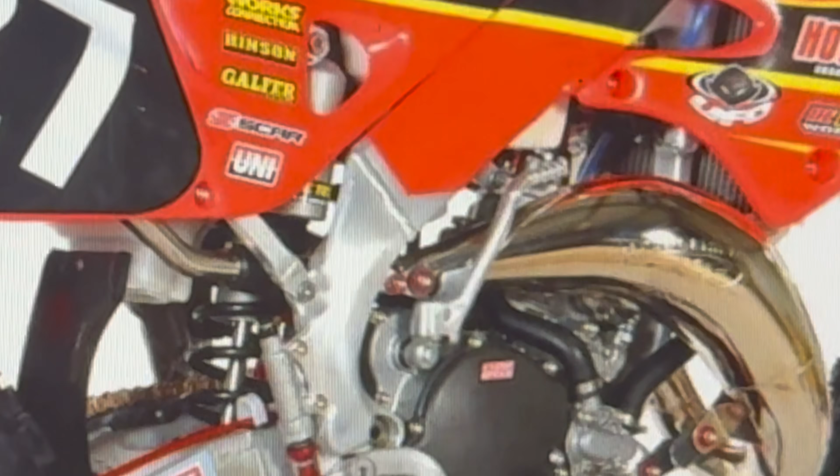Odds are, if you've ridden a dirt bike before, you know exactly what this is. And if not, I'll break it down for you. So for a majority of dirt bike history, this has been the main way that you start a bike.

Essentially, you just unfold the lever and kick it, hence the name, the Kickstarter. What this does is spool up the motor enough to give it a chance to start firing under its own load. But the thing is, in recent times, all major bikes have switched to electric start.

And if you don't know why this is so important, let me explain it to you. Let's say you're riding your bike and you go up this hill. Right before you get to the top, you turn away a little bit and now you're stuck on the side of the hill. Your bike died, so you're pretty much stranded.

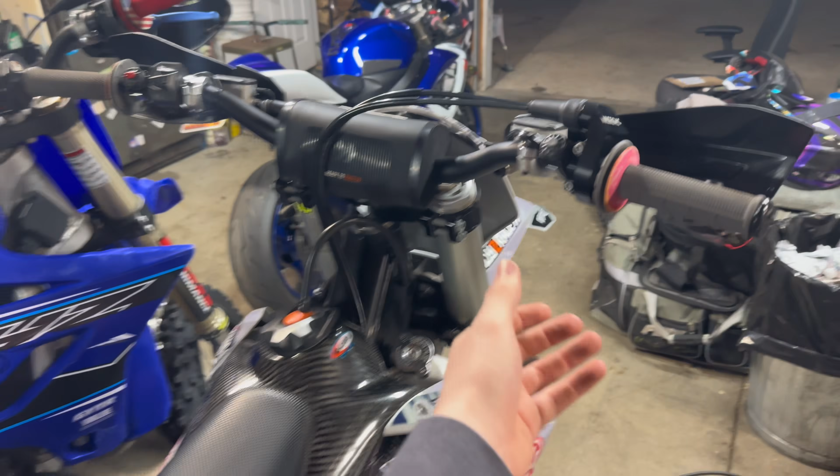Now in order to start your bike, you have to kick it. So you pull out your lever and you get ready to start kicking it, and then you completely fall down the hill. Whereas if you had electric start here, you could just press the button and went on your way.

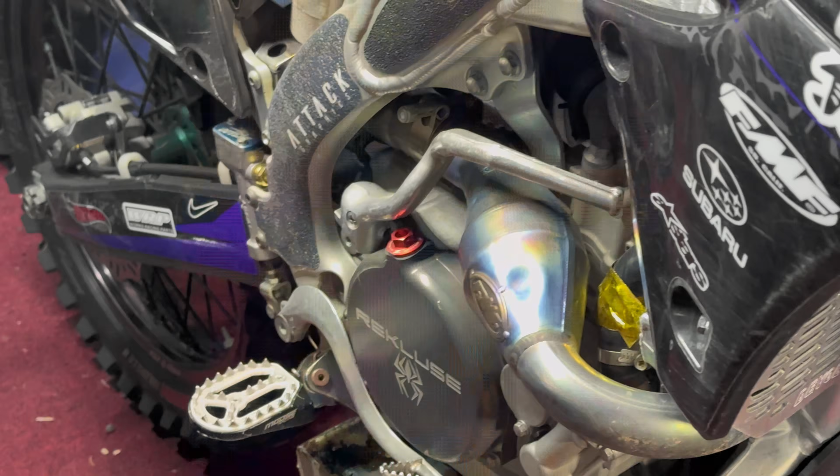This is the exact thing that made me want to solve this e-start problem for older bikes. Because if you put a bunch of money and time into a bike that you love, you shouldn't have to give it up just to have electric start. And over the past 6 months, this is what I've spent all my time developing.

And today, I'm going to be working on the best version I've ever made. But I'm kind of jumping ahead of myself here. So let me just explain how this all is going to work.

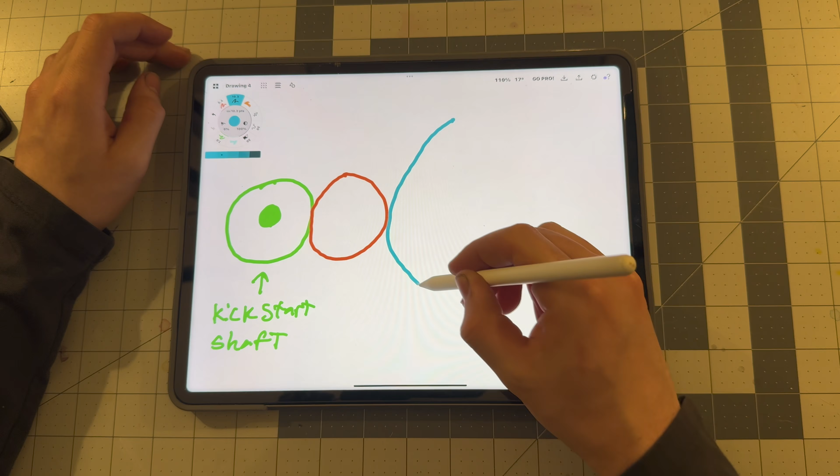Starting from inside the bike: when you kick your bike, you're actually just turning a gear, which turns another gear, which turns another gear, which turns the crankshaft. And turning your crankshaft is what allows the bike to start itself.

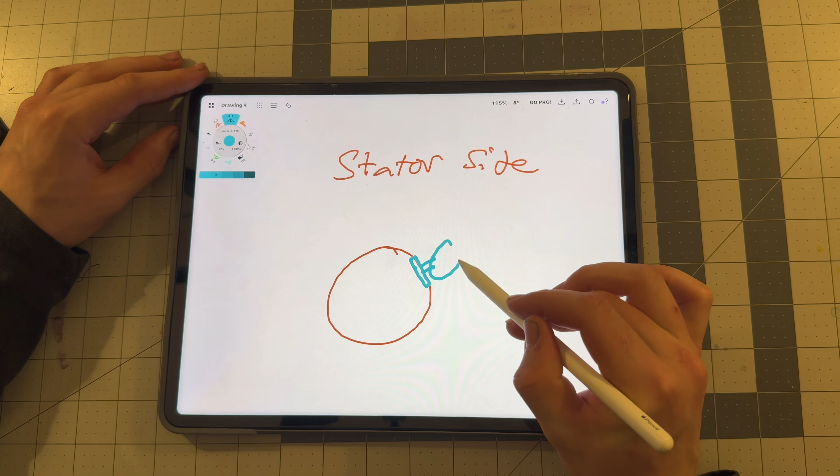Now there are some other people who've designed kits for certain bikes that use this crankshaft thing, but they're smart enough to bypass the whole kickstart deal and they just go on the stator side, which gives you a much easier access to the crank. Thing is, if you do that, you have to build a whole custom stator, and it's extremely bike specific.

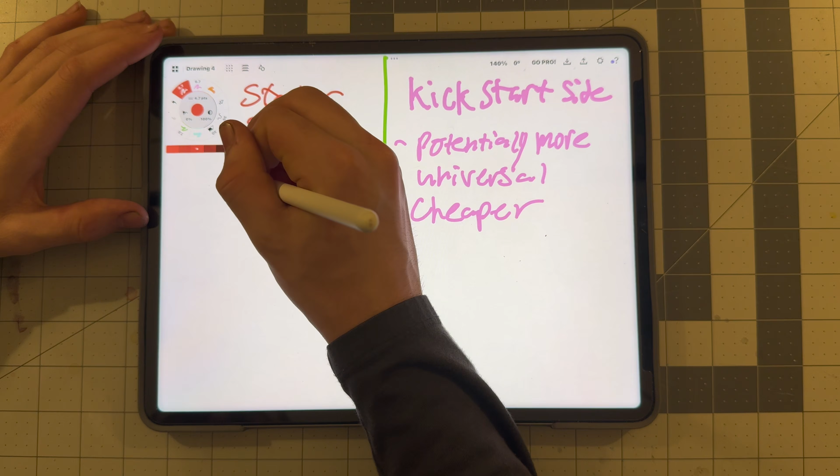But I think if you can make something that goes off of the kickstart shaft and not have to go in the bike as much, you can be way more universal and get a ton more bikes. But here's the deal, right?

When you kick your bike, you're actually sending that kick through a speed increaser. So one kick is like 3 or 4 rotations at the crank. So if I want to make something that can do this automatically with a motor, there's a few things I have to figure out.

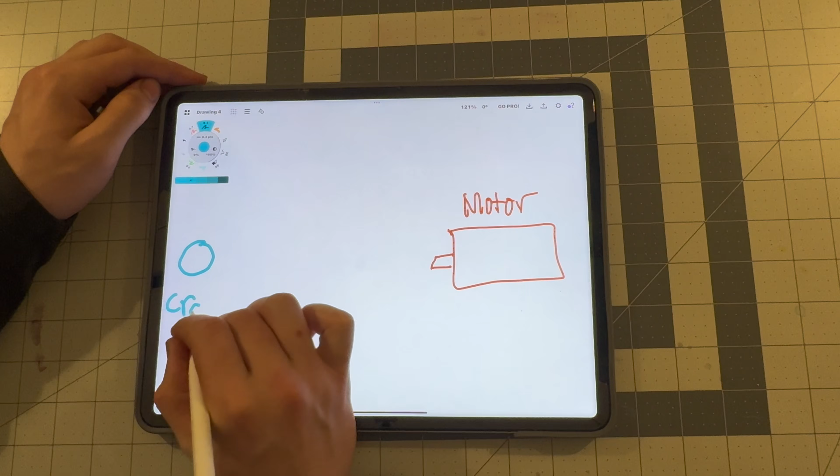I'm gonna have to figure out how to reverse the whole gear reduction that's inside the bike, and then also have to figure out how I'm gonna match the force needed from a kick on the outside of the bike to the kickstart shaft.

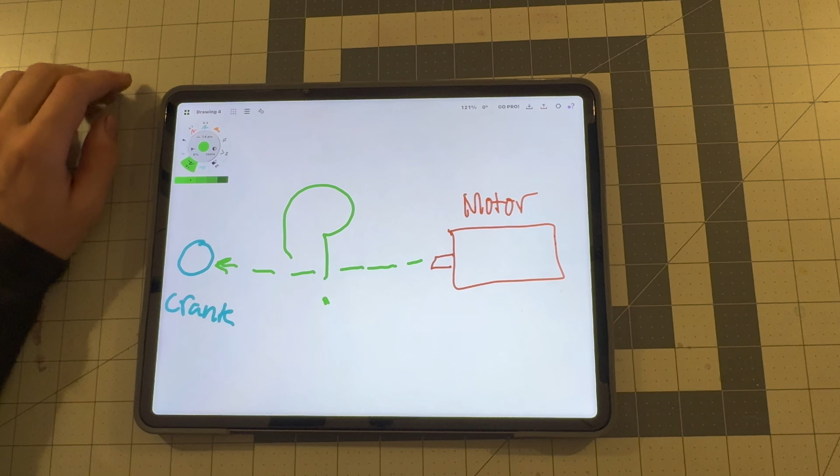And then we have to think about, if I'm gonna have this be like a regular e-start, that kickstart shaft is gonna have to be constantly spinning one direction. So I'm gonna need some sort of clutch mechanism to make this happen.

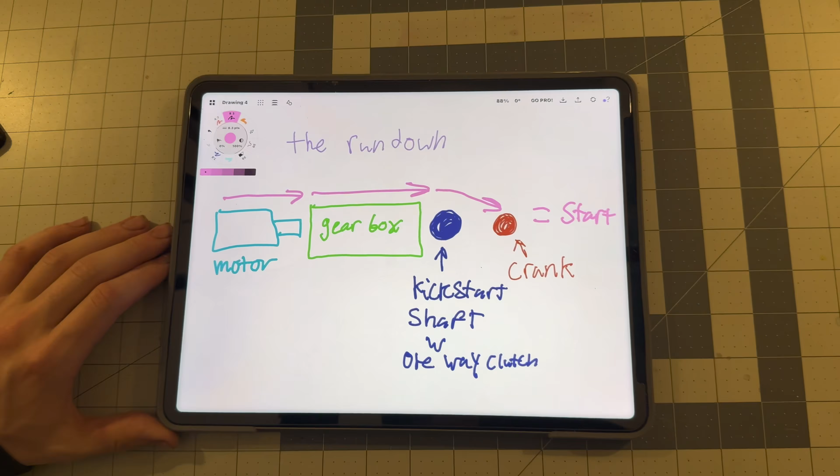So here's how this is all gonna work. I'm gonna make a gear reduction that goes off of my starter motor, which attaches to my kickstart shaft, which has a built-in one-way clutch mechanism, which then transmits torque straight to the crank through the original kickstart shaft stuff inside the bike. To do this gear reduction, I'm gonna use a massive compound gear train.

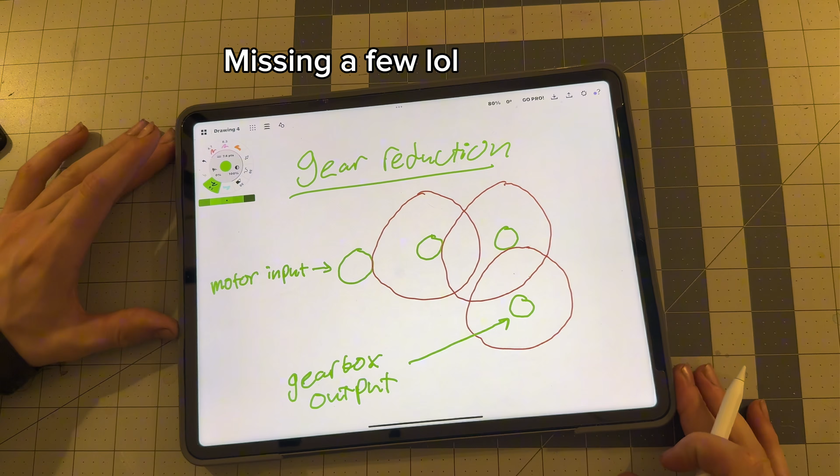Now I'm gonna be honest with you, this is the first time that I've ever made a compound gear train gearbox. I did my math on my reduction and I should need like 5 or 6 gears to make this happen. And after getting everything sized up and looking right, it was time to organize these gears in a way that would fit where I need them to fit.

Because this would all be easy if I could just make it huge, but this has to be able to fit on a bike and be reasonable.

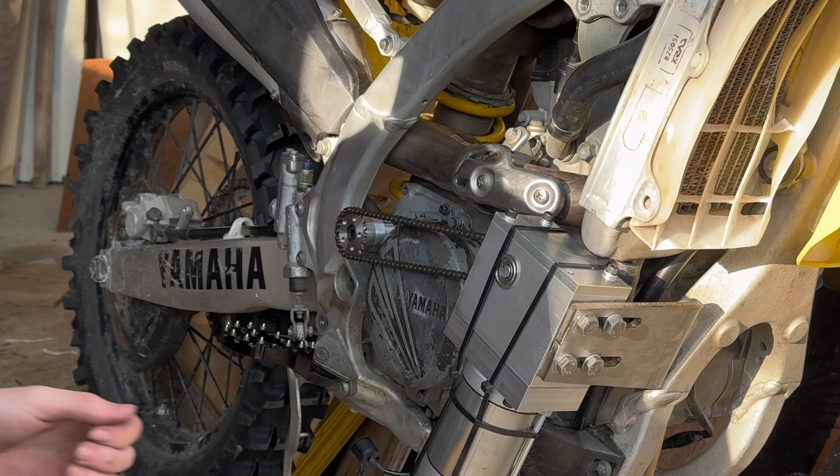Also, in my last design, I used a chain to drive from the gearbox to the kickstart shaft, but this time I'm going to use a shaft instead. This shaft will go straight to a gear inside the gearbox, which connects to a crown gear that starts the whole drivetrain of the system.

There's a lot of interesting things I could go into with this, but with that done, I moved on to figuring out my internal clutch mechanism for this design.

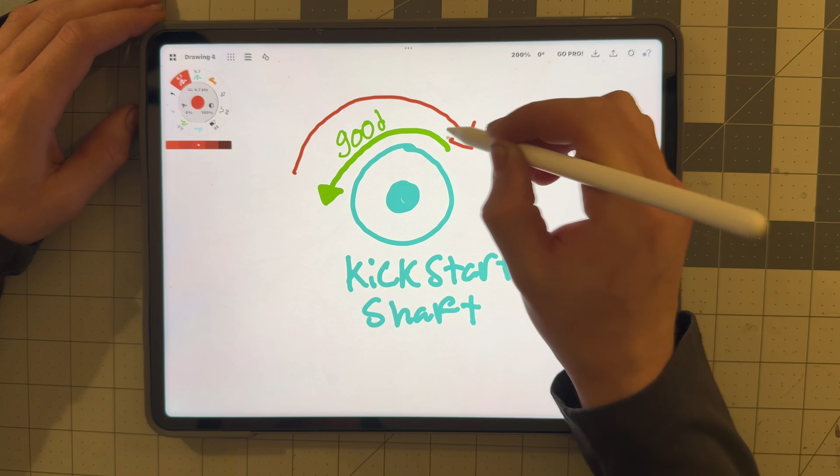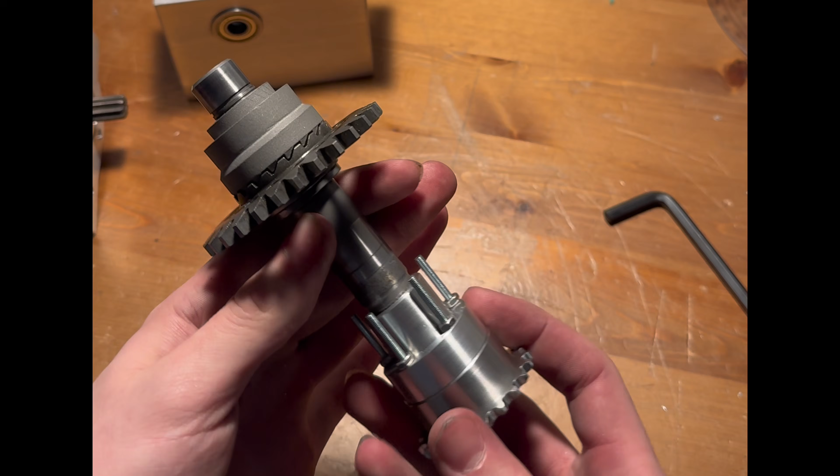On the last iteration of this, I used a helical threads kind of design. Imagine you have a bolt and a nut, and you want to move the nut up the bolt a little bit - you just turn the bolt underneath the nut. So if you think of my kickstart shaft as the bolt and my clutch mechanism as the nut, you can see how I could use this.

When the kickstart shaft is turned, it will move the clutch grabber piece towards the back of the starter gear. From the factory, the starter gear has teeth on it that allow it to be driven this way. Then when the motor takes over power, it will automatically disengage because of the way the ramps are designed.

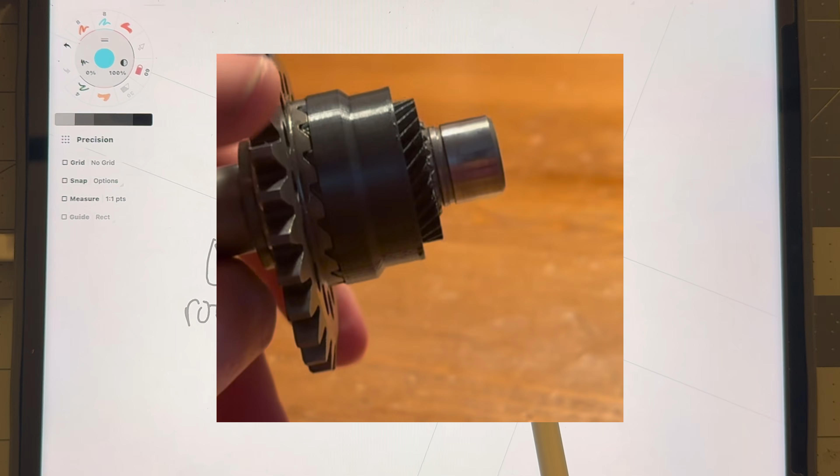Just a reminder, this was the idea for version 1, which in real life looked pretty cool and I was excited to try it out. I was really hoping the surface finish wouldn't matter. But once I went to test it, it ended up not actuating as much as I wanted it to.

God damn it, I always forget to do that.

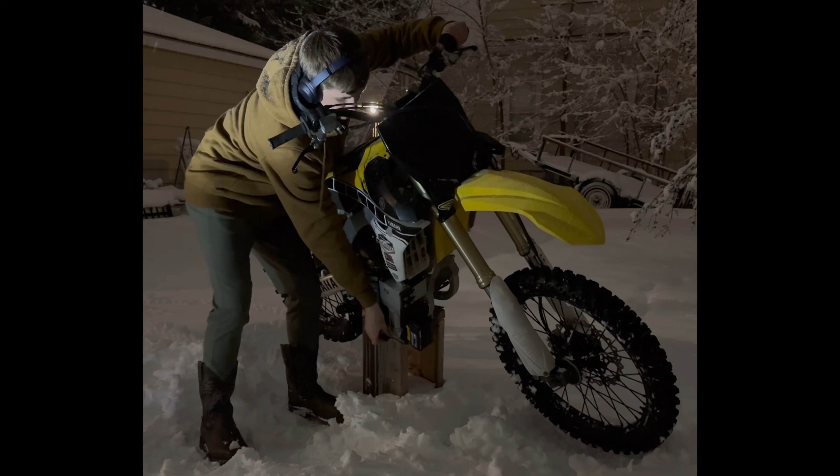In order for me to even test it last time, I had to tilt the entire bike over. So we need a rework for this time.

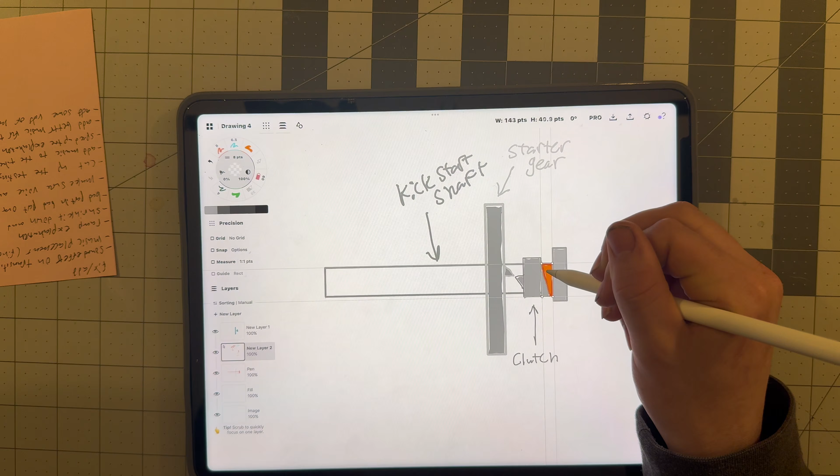My idea was to use a set of ramps. These ramps would essentially have the same function as the threads, except they were a different design with a lot less friction. When the shaft is turned, the clutch will rise up because of the ramps.

When it does this, it will engage with the starter gear, which will start the bike. After the bike is firing on its own, it will automatically disengage like the last design. With this change, paired with my new gearbox, I felt ready to make the mounts for this.

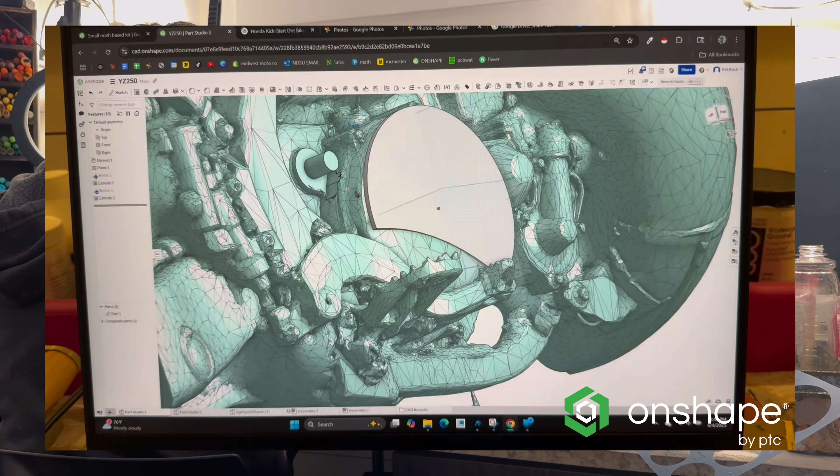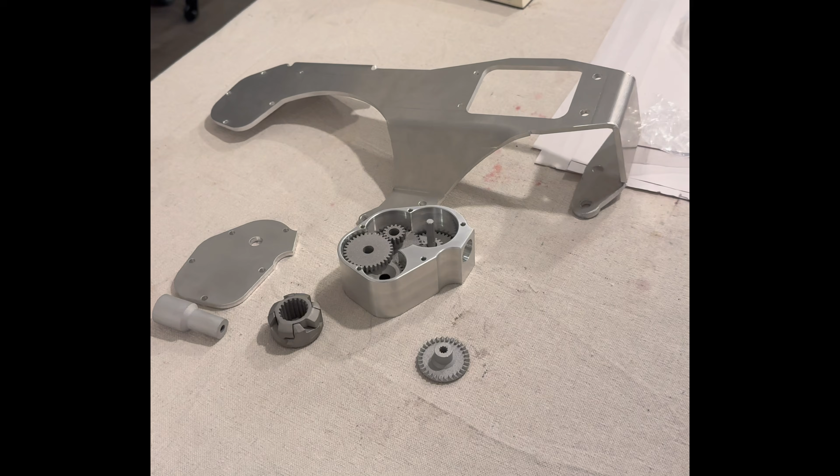Since I don't really have a shop or tools, I'm going to order all my parts online. In a week or two I had all my parts ready and we were going to do some assembly. One hidden bonus of ordering parts is they're usually made perfectly and I don't have to do anything, so it's kind of a bonus.

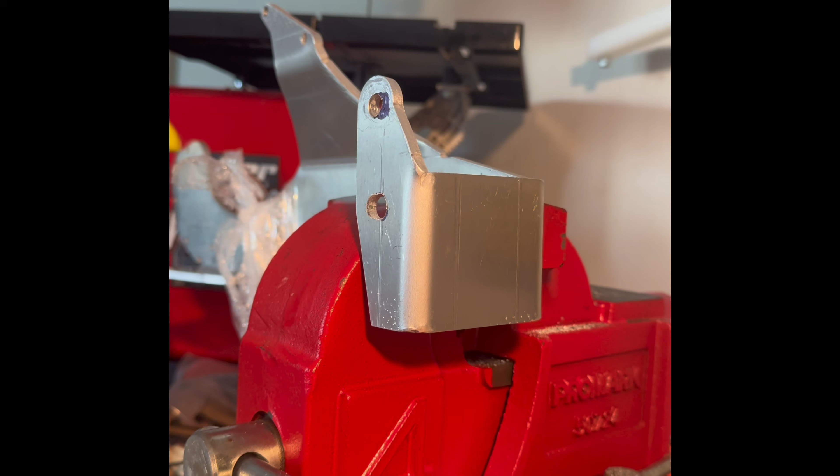But I was able to do a dry fit and make some adjustments I needed to make, like a few holes that were too small and some splines that didn't end up fitting where I needed them to. So I burned a few days making sure everything fit right and all my tolerances were okay, and that's all on me.

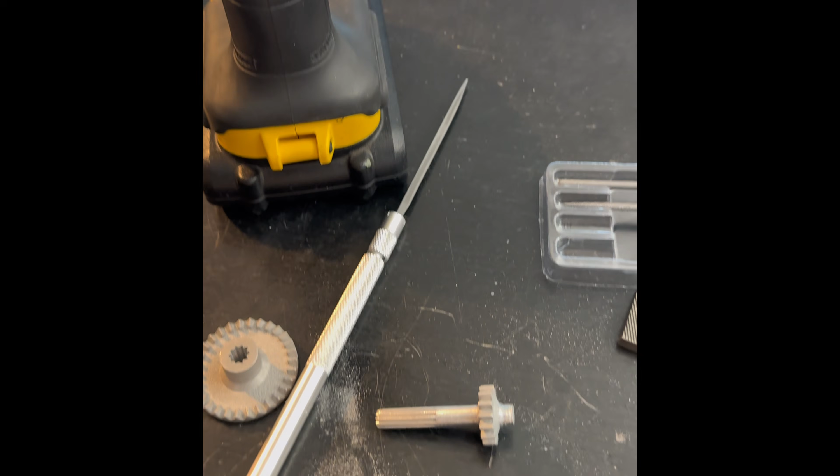So here's the thing - when you order a part and it's not designed properly, no matter how great they make the part, it's never going to work. Note to self for next time: don't make bad parts. But after I had it mostly together, we were ready for a few bench tests.

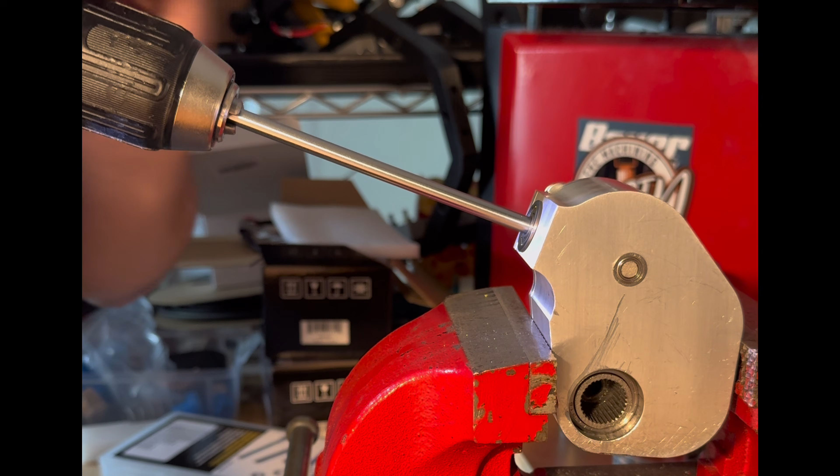Beautiful. And judging by the fact that there wasn't any explosions, I think we're looking pretty good for the next stage of testing. Okay, don't mind the mess, it's absolute chaos.

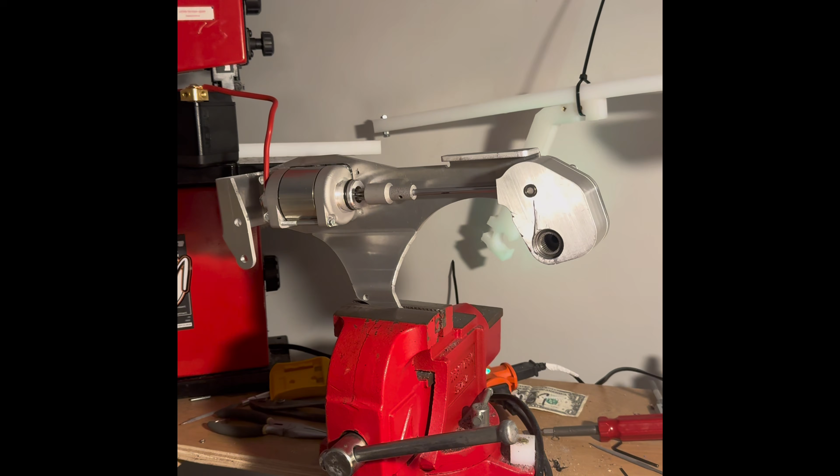There's our positive, and here is our ground. So we're about to do the first test ever. Well, the other one didn't go very well. 2, 1. So we're gonna call this the first ever one. Okay, here we go. 3, 2, 1.

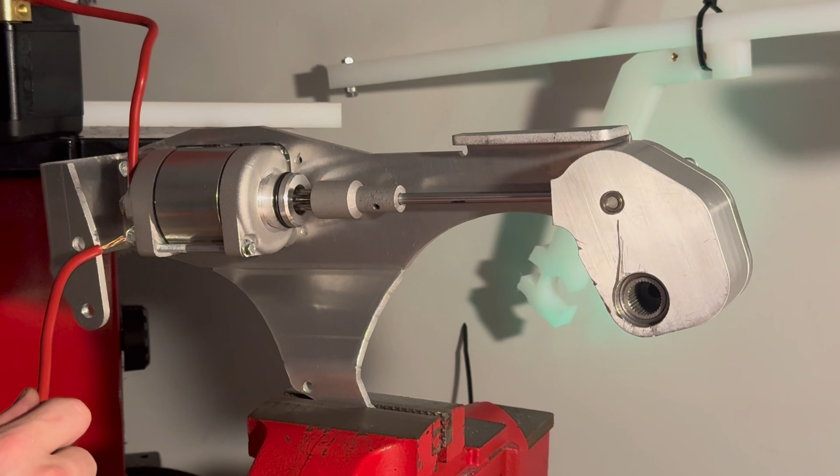That did not sound good. Try it again.

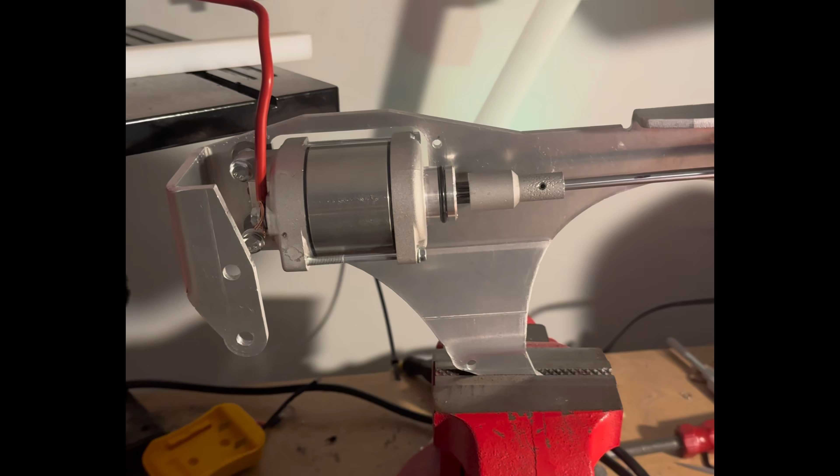Wow, that was bad. Okay, so upon further inspection, the reason why I was making that chattering is, so I didn't tighten my bolts down enough. I don't know why I didn't do that. Yeah, they're like finger tight.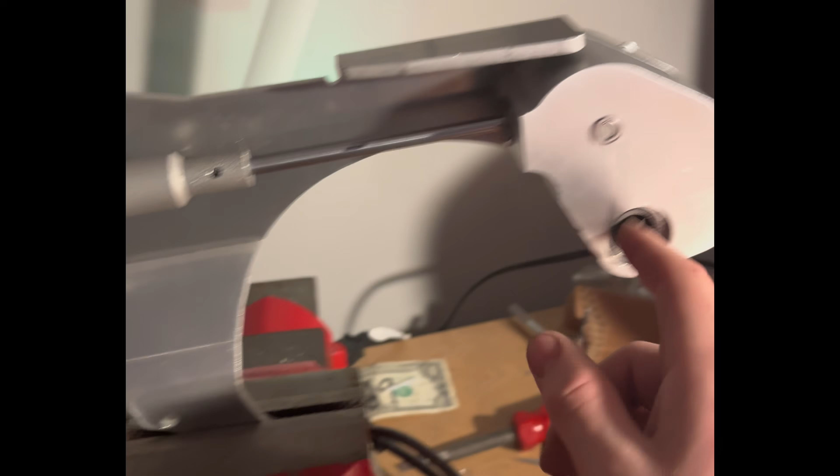But I want to open this up anyways and see how it looks in there now. Is this? Not too bad. This thing is fine. Whatever. Fine.

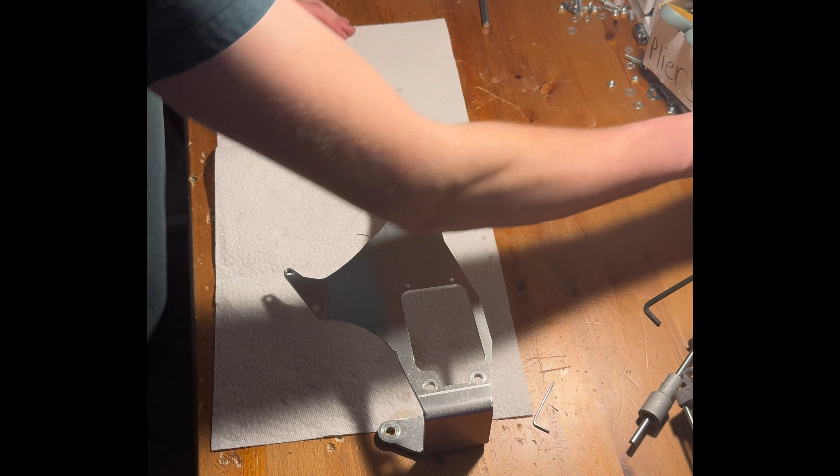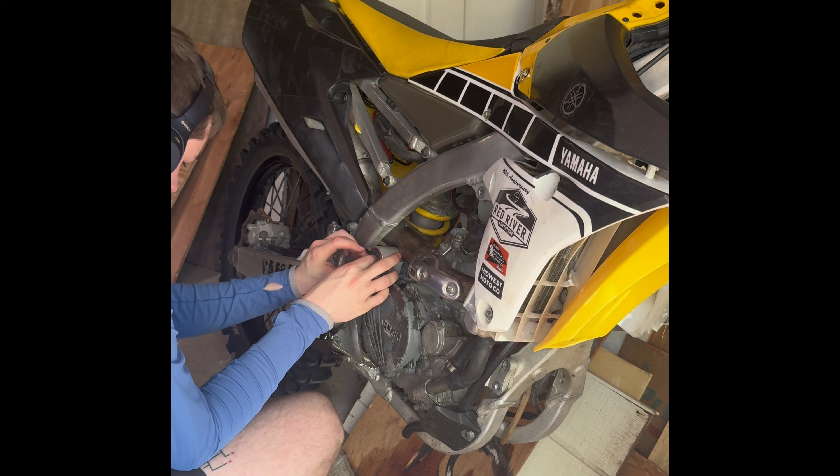So to sum up my findings, what I found is that the aluminum gears showed a little bit of wear, and I think that was from the chatter, but everything else was pretty much fine. So I decided it was about time. What's that?

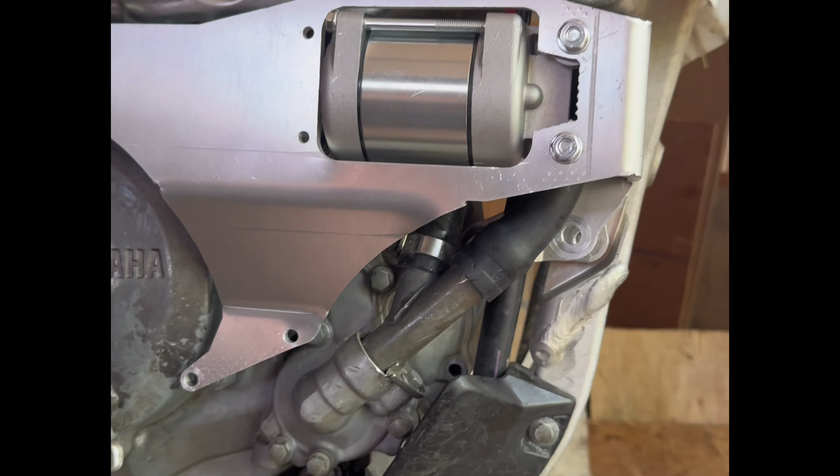So here's the issue. That hole isn't quite lining up. Okay, so I need to file that out.

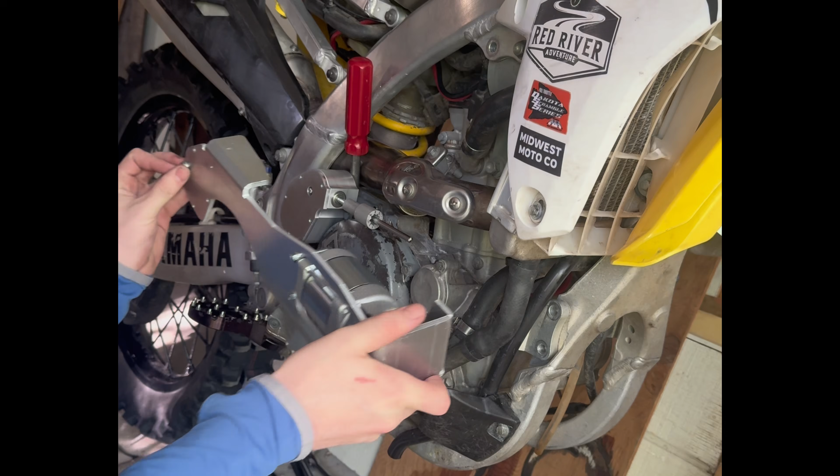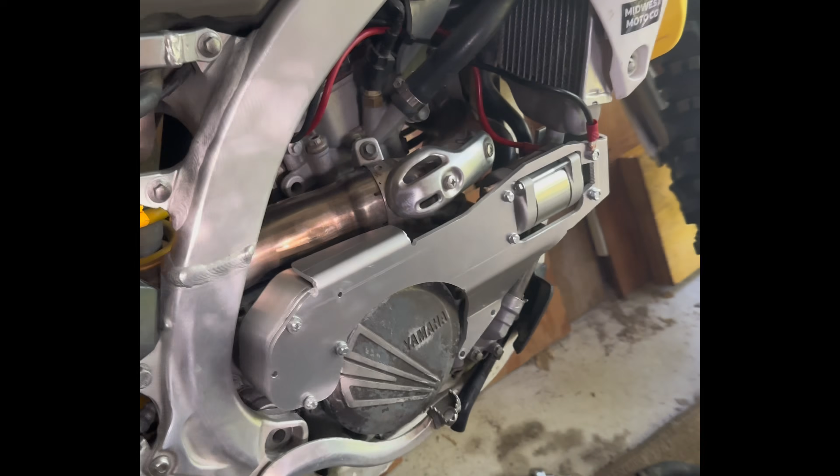Okay, it's officially mounted up to the bike to run, and it does stick out way farther than it will in the end. I messed up something and it doesn't want to go back in there all the way, but that's fine for now. So we're gonna get a test in here pretty quick.

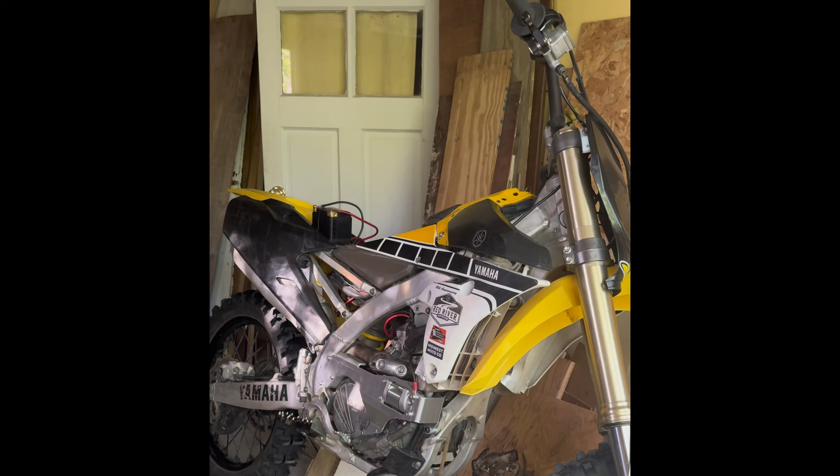Okay, I'm pretty scared, honestly. Okay, here we go. 3, 2, I'm gonna look away.

So what's happening here is my motor was plugged in backwards, so it was spinning the wrong way and nothing was working. And I'll save you guys the hour it took me to figure out what was going on and just play the next clip.

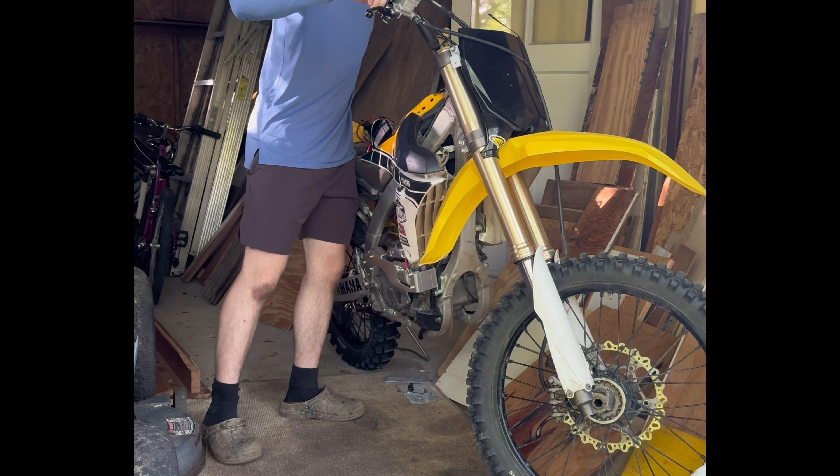So I tried in the garage for another 2 or 3 attempts with no results. And I even went outside and tried it and went as far as I could and it still didn't do anything. So I decided that my clutch was the problem and I just had to hand actuate it in order to get a real test in. And after that, we were ready.

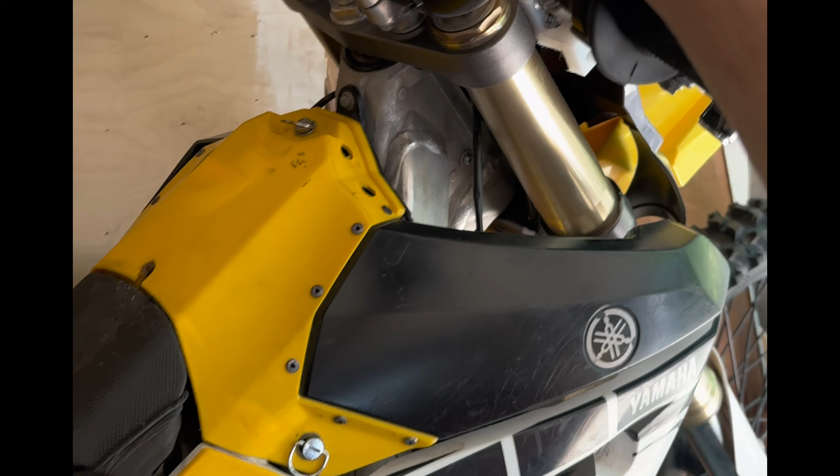I've got it activated. Let's see what happens when I press the button. That did not really sound good.

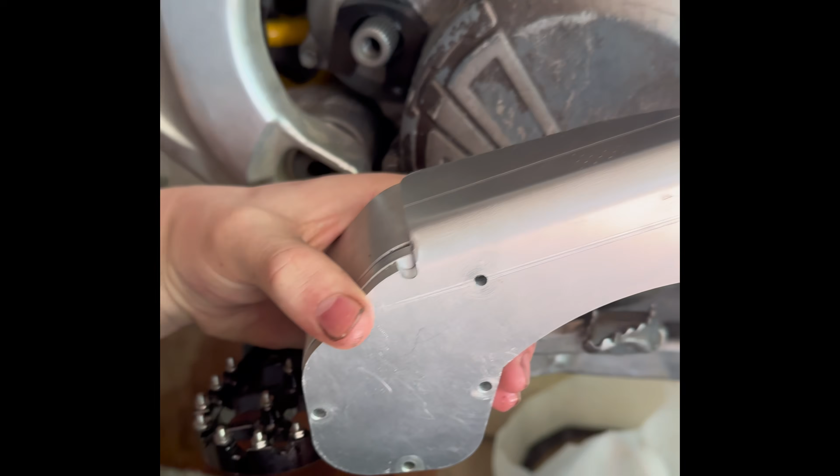Okay, I unbolted the gearbox. I'm just gonna do this. And we're gonna take this inside and check it out together because I don't know what's going on in here.

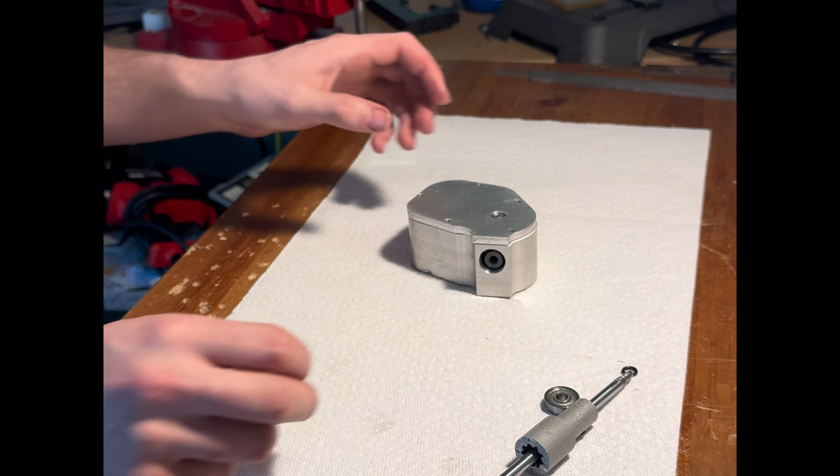So, it appears I have found my problem. I'm kind of scared. Most of the assembly is fine. Oh man.

That bearing absolutely disintegrated. Oh no. Oh man.

So yeah, we had an absolute blowout. And honestly, I was not expecting this at all. I was pretty bummed for the rest of the day after this, and I didn't really want to do anything. But then I started thinking about why this happened.

And I realized that the reason why this failed is because I didn't design it right at all. I didn't do nearly as much calculations as I should have, and after looking back at it, all of these were pretty much going to fail anyways. So even though this version failed, this was my way of getting the wake-up call that the next version will be based purely off math.

I'm going to try to detach all emotion and all feelings of what I think is going to work, and I want only what will work. I'm definitely a learn by doing kind of guy, and this was definitely my way of learning this. That being said, I absolutely refuse to give up on this, and I'm already in way too deep.

Since this failure, I started working on version 3, and I'm super excited for that one, because when doing my math, it says it will actually work.